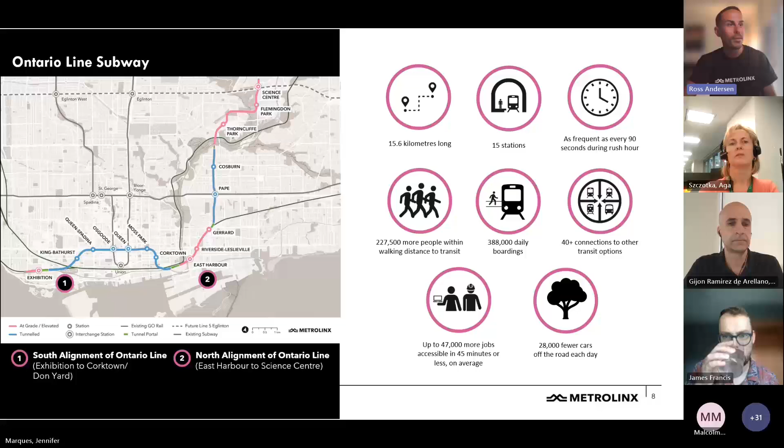So OTG, you'll hear that name a lot this evening, is an acronym for Ontario Transit Group. Ontario Transit Group is a joint venture between a couple of companies, Ferrovial Construction and Vinci Construction, but essentially they're the folks designing and building what we know as the southern portion of the Ontario Line subway, Southern Civil in other words. The southern portion is the highlighted portion you see in this graphic here.

The southern portion will consist of one above-ground station integrated with the GO Transit station. That's the Exhibition station that will be rebuilt, serving as both a GO station and an Ontario Line station. There are the two underground stations I mentioned, where you'll intersect with Osgoode and Queen Subway Station, but there will also be 4 additional stations in the southern alignment at King Bathurst, Moss Park, Corktown, and the station we're discussing tonight, Queen Spadina. Overall, the southern portion tunnel will be 6 kilometers long, with associated tunneling works from Exhibition to the Don Yard portal.

A portal is where the subway is going to enter the earth and exit the earth. Next slide, please.

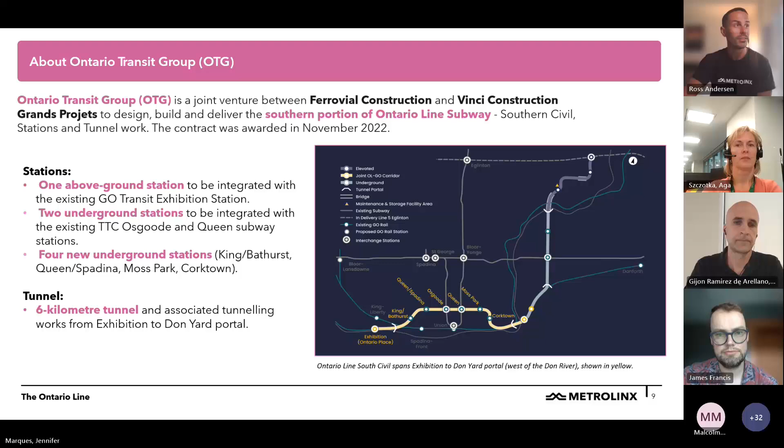Let's talk a little bit about Queen Spadina Station. I'd mentioned earlier there are 2 stations at Queen Spadina. We call them head houses - this is where you enter the station. Essentially, it'll be at the northwest/southwest corner of Queen Spadina, and then there will be one at the northeast corner. The Queen Spadina station is really interesting because the heritage facade is being protected at the northeast corner.

You might have noticed a big freestanding wall where you walk by on the north part of Queen Street. That wall will stay there throughout construction, and the intention is to integrate that wall with the design back into the station. Queen Spadina is not the only area where we're doing this - it's happening as well at Osgoode and at King Station. This is one of the ways the Ontario Line team and Metrolinx team are working to preserve some of that history while integrating it with modern subway technology.

As I'd mentioned, there are 2 new station buildings that will be constructed, and the current plans envision maintaining streetcar services through these areas throughout the duration of the project.

One thing that's really important to note is Metrolinx and the Ontario Line team work very closely with TTC. We are aware that streetcar service sometimes can be disrupted, and we do know the reality of what's happening on Spadina, where there are buses currently serving as streetcars until the end of the year. This isn't going to necessarily affect the project, but these are some of the conversations happening behind the scenes to make sure there is a seamless workflow between so many different projects happening in the city at once, whether it's the TTC transit project, other condos being built, or other parades in the area. Everybody has to work together to some degree to make sure the city can continue to function as a city.

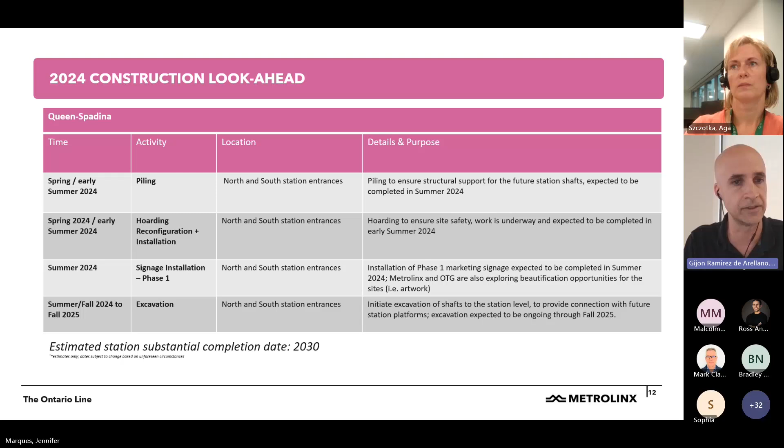During the spring and early summer, we will complete the piling works. Piling works are constructed to provide a safe infrastructure to proceed with the next activity, that is the shaft excavation. We have been doing piling since February, and we are expecting to have this activity completed on the southwest corner in July.

2024. Right after the piling works, we will complete the installation of the hoarding in both entrances, and then we will proceed with installation of the signage. Those signs in phase one will be related to marketing regarding Metrolinx and the Ontario Line project. And we are also exploring beautification opportunities for the sites with some artworks and future renderings about the project.

Starting in July, few days from now, we will start the excavation of the northeast corner, northeast station. This activity will start in July and will continue up to the fall of 2025. This activity for excavation will include not only the excavation of the shaft, but also the excavation of the station below Queen Street.

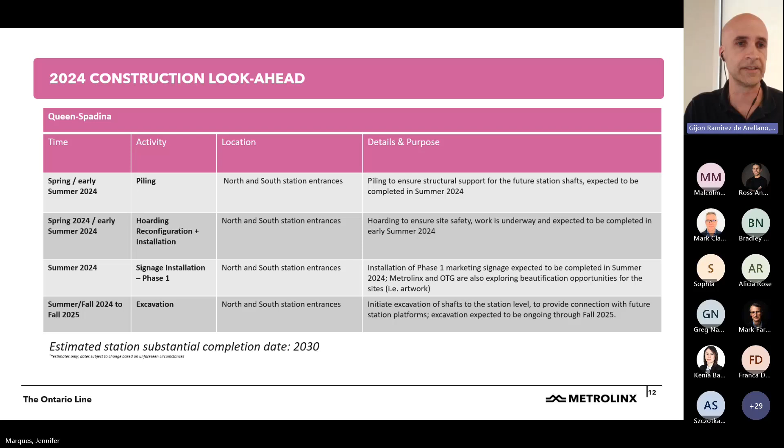So we maintain the estimated station substantial completion date for this project in 2030. This includes not only Queen Spadina Station, but also the 7 stations that are in Ontario Line South and the tunnel. We can go to the next slide, please.

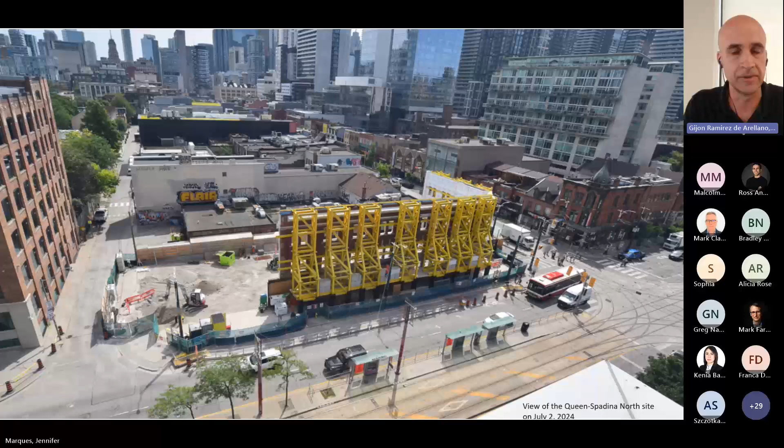So this picture that you can see in the presentation was taken a couple of days ago, this week, July 2nd. On this view, you are able to see the facade that has been retained in place. This facade will be integrated into the future station building.

And on this picture, we can see that all the piles have been completed inside of the station footprint. And we are working right now on temporary works to start the next activity, the excavation of the shaft. We can go to the next slide, please.

Okay, next slide. I will speak now about the excavation. As Ross has explained before, this station has 2 main entrances. They are 2 what we call shaft entrances. Those shafts go from the street level and 40 meters down in order to connect the station with the tunnel. The tunnel goes from the Exhibition portal to Corktown, 40 meters below the street level.

So right now we have completed the support of excavation, and we will mobilize all of our equipment to start the excavation. The first 18 meters, we will see clays and sand, so soft materials. Below 18 meters, we will find the rock that is part of the bedrock for this area.

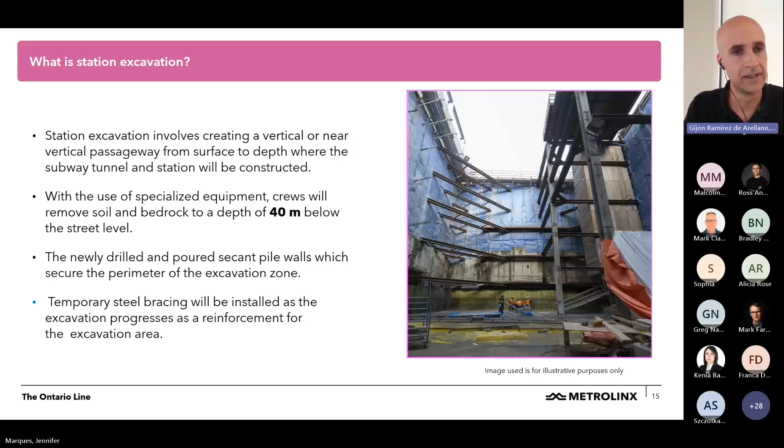So the excavation schedule for Queen Spadina, as I mentioned before, we are planning to start in the northeast corner in July 2024. We'll arrive to the level of the cavern by the end of the year, and then we will start the excavation of the cavern in early 2025 up to the end of 2025, late fall 2025.

The expected hours of work for these sites are 7 a.m. to 11 p.m. working in two shifts. We will have some occasional overnight work and Saturday shift during the day. This will happen in both entrances, north and south.

We are anticipating to start excavation on the south by late August, and from this side, from the south, we will only excavate the shaft. We will not do any excavation of the station from that point.

Okay, we can go to the next slide.

What you will see around the construction site during these activities, or in the coming weeks, is that all the drilling machines that we had on site will be demobilized as we complete the piling works. And we will deliver some excavation equipment.

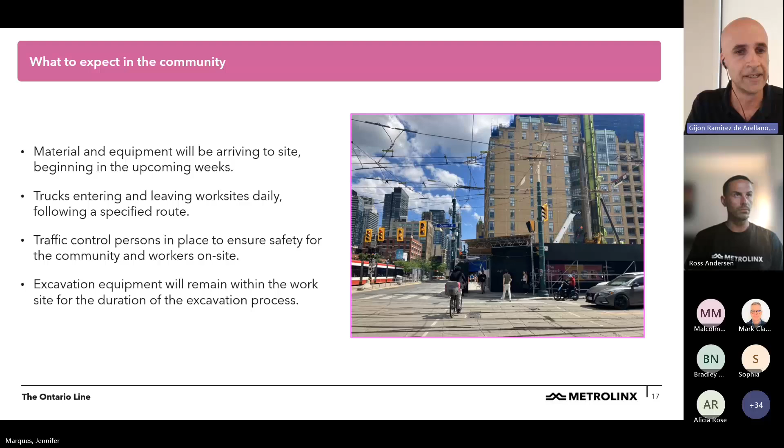Okay, we can go to the next slide.

Okay, we can go to the next slide.

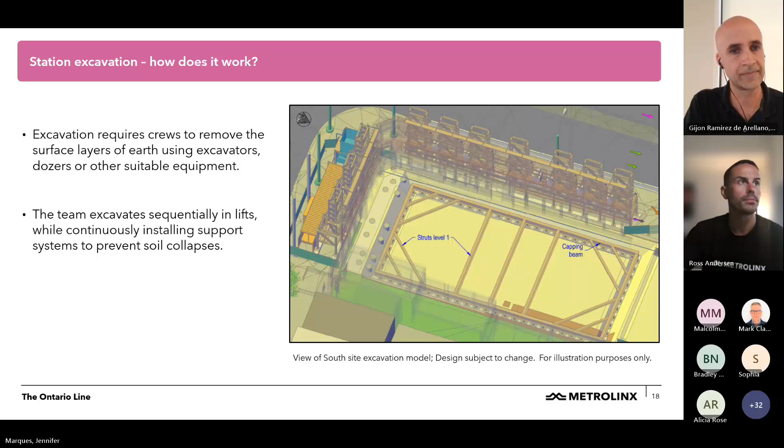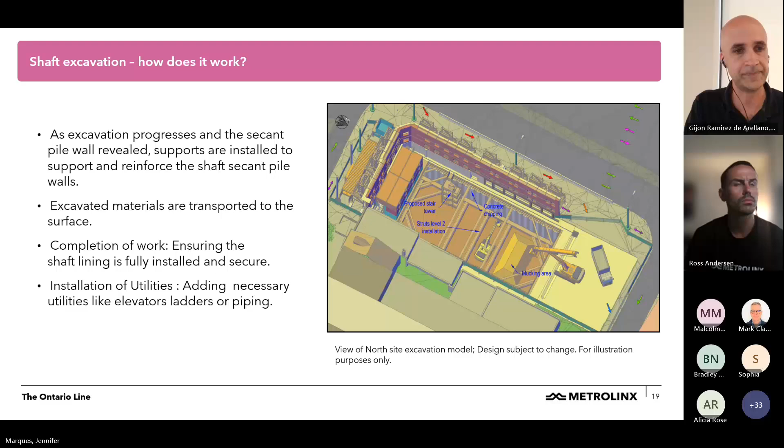This full system will prevent any damage to the adjacent structures or any settlement on the road or a streetcar or buildings. We can go to the next slide.

So this is a list of materials that you will see on the project in the coming weeks. So we will have multiple excavators. The plan is to have 2-3 excavators on the subsurface. There will be one on the surface.

We will see dump trucks entering and exiting the site. Those trucks will be loaded by excavators, and they are hauling this material off the site to the approved dump site facilities. Loaders are used also to load trucks, and from time to time we will see cranes to be able to put the equipment inside of the shaft.

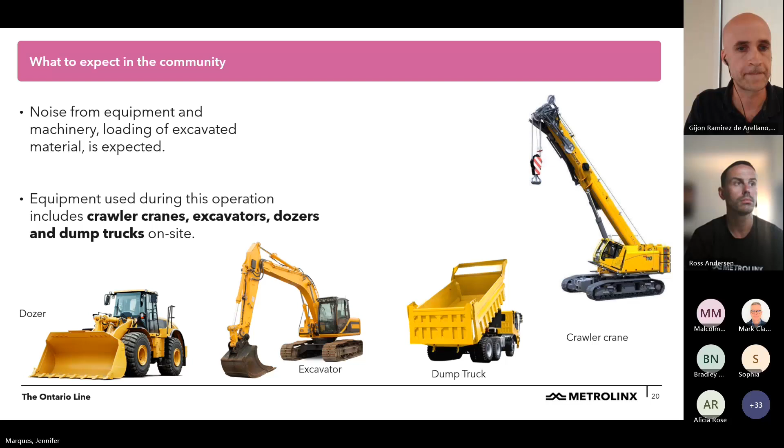We can go to the next slide. Okay, we can talk now about how we are planning to reduce impacts to the community. We can go to the next slide. So talking about the access points and lane affections that we are going to have here.

So about the northeast corner of Queen and Spadina, our plan is to have the trucks entering from Spadina southbound. They will access the site and they will exit through Bulwer Street. Okay, and then from there they will be directed to the main roads in order to haul off all this material from the site.

On the southwest corner, the trucks will enter from Queen Street. They will be loaded on the site and they will exit onto Spadina Avenue going south. We will maintain all the sidewalks open and accessible. We will have a parking lane closure on the northeast corner. This parking lane closure is currently closed.

I think we are going to talk about the lane closures in the next slide. I think, yeah, I have mentioned all the traffic routes. We can go to the next slide.

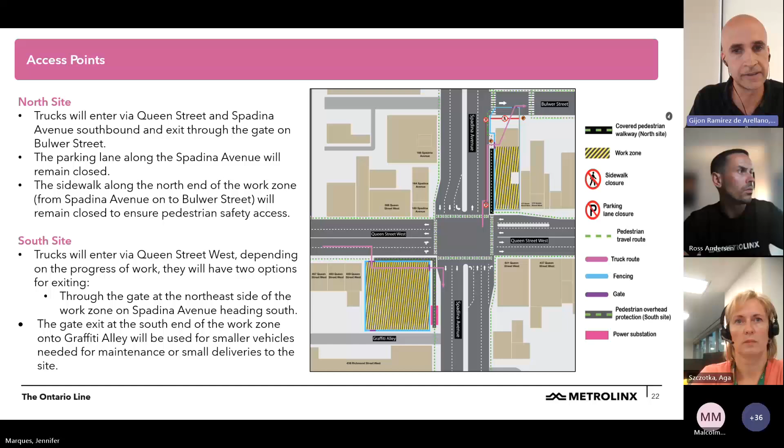All the sidewalks and bike lanes will remain open, so pedestrians will continue to use sidewalks along the work zone. For any particular activity that may require a temporary closure of the sidewalk, we will facilitate pedestrian access at all times using flaggers and alternative pedestrian routes.

The parking lane on Spadina Avenue will be closed. It's currently closed since we started the project, and we will maintain it closed to facilitate access of the trucks and also to avoid any damage to vehicles that could park in that area. The curb lane on Queen Street West eastbound will be closed daily to facilitate truck access to the southwest entrance.

We will maintain all the lanes open with the exception mentioned before. Queen Street westbound will maintain the two lanes currently in place. Spadina Avenue has no traffic restrictions. Graffiti Alley will remain open, and Bulwer Street will be accessible. We don't expect any impacts to traffic or public transit.

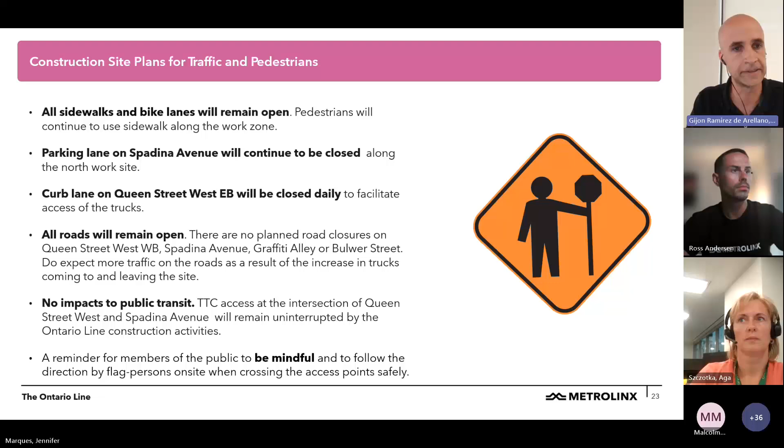I'll pass this to Aga, our environmental manager. She will speak about the measures we have in place to minimize noise and air quality disruptions. Thank you, Sergio. I'm going to discuss the impacts we are expecting during our excavation works.

Let's start with air quality. We may expect some dust coming from excavations, and we have mitigation in place to keep dust to a minimum, such as dust suppression, most commonly. For minimizing noise, we have site hoarding installed.

We also have a one-way truck system to avoid backing alarms. For any possible mud tracking from the site, we will use street sweepers on a regular basis. We've also already installed mud mats at both sites. You can see one of our mud mats here. They are really good at getting most of the mud off truck wheels and provide additional mitigation alongside the street sweepers. We also propose a drainage system to ensure site water is gathered and runoff is minimized.

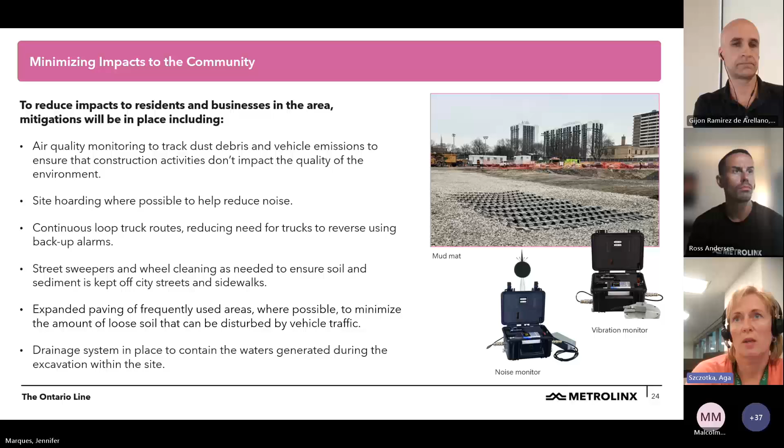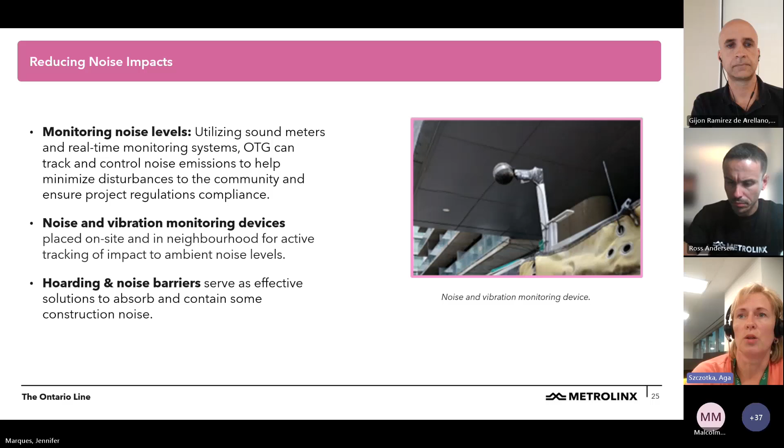In terms of noise from the excavations, we are monitoring our noise levels live. Readings come to our environmental team, and we are able to read them and discuss them with our site teams. Same for vibration monitoring. As mentioned before, the hoarding provides quite effective mitigation for reducing noise.

Next slide, please. All right, I think that's it. Thank you so much, Aga, and thank you so much, Sergio, and thank you everyone for listening.

There's a lot of information that was just covered. To briefly recap, we discussed three major points: the next phase of construction, excavation, which will be happening later this summer and continuing into fall 2025 at both sites; maintaining traffic flow with a one-way in, one-way out system for trucks integrated with the current traffic flow at Queen Street and Spadina Avenue; and reducing dust and other impacts like noise.

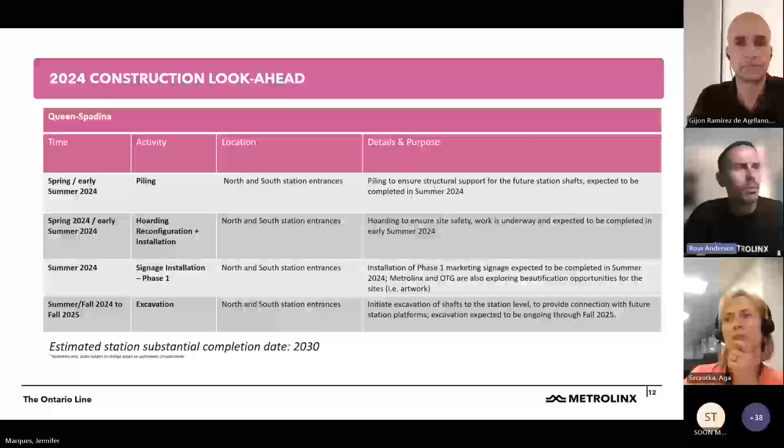Okay, thank you for your question. We appreciate that. Could whoever's sharing the screen please go to slide 10? In the meantime, I'll reiterate the question. There's threefold to this. First, will the subway tunneling happen underneath 438 Richmond? We see Richmond Street on the map, and 438 Richmond, according to this map if it's to scale, is not in the path of the tunneling.

The question also was about utilities. James, perhaps you might have some information.

Thanks, Ross. Just to add to that, the Ontario Line is quite deep at this location. We have a line that's kind of at the surface at Exhibition Station, and then we go underground through this part of downtown, and we're quite deep, well below street level. That's to get to the right depth to avoid utilities, and also to get us under the next station east of here at University, so we're below the existing Line 1 TTC station. The line will be constructed, tunneled, and operated surrounded by rock, so we don't anticipate any perceptibility of the subway operating at nearby buildings in future. We're very pleased to be bringing subway service to this community, with entrances on the northeast and southwest corners of the intersection, but without impacting folks in those buildings. So this will be very deep and not really perceptible to folks in the neighborhood once we're into operations.

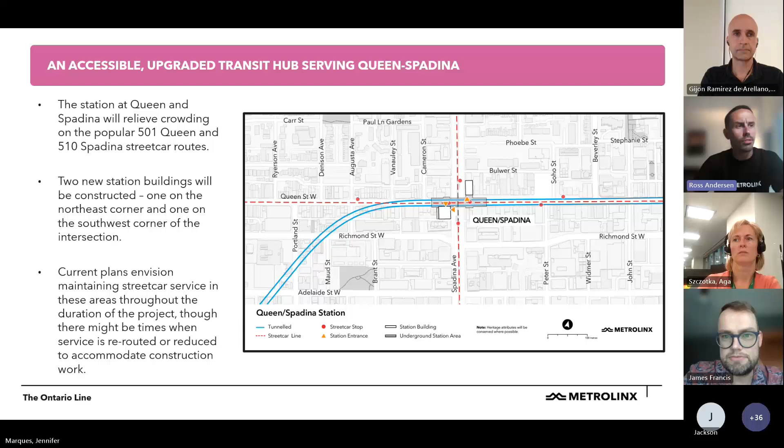Jackson, you'd asked about the hours for excavation. On the south site, excavation is going to begin roughly in August. Working hours will be weekdays from 7 a.m. to 11 p.m., occasionally overnight and Saturday shifts, but we try to avoid those because we don't want to work on weekends, and we want to respect the tenants who live in the area, because people don't want to be woken up from construction.

On the north side as well, it's 7 a.m. to 11 p.m., occasionally overnight and Saturday shifts. A lot of the times the work hours are subject to change, they're weather dependent. Sometimes schedules change, but we'll be sure to communicate that with 2 weeks notice or more if we're able to, so residents are able to make adequate plans ahead of time should there be weekend work.

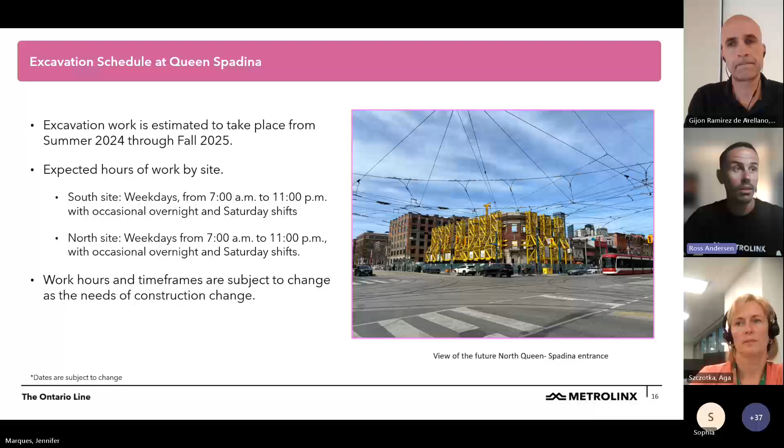Thank you so much for your question, Sophia, it's certainly an important one. I'm going to ask my colleague behind the screen—Jennifer, can you go to slide 26 for us please? There's a lot of good information here about dust. Aga, can we talk a little about the difference between the dust caused by piling versus some of the dust folks might see from excavation, and how effective some of these techniques are in suppressing the dust?

The residents I spoke to at the Morgan at 438 Richmond last week still experience a lot of dust coming into their windows. I know a lot of these residents face the construction site, and we do have a lot of these techniques in place, but is there anything more that can be done than what is currently being done?

Absolutely, Ross. So the difference is with piling works, we started piling in the top level of soils, and there's a lot of loose, thin soil that's very easily disturbed, and that's where the dust is coming from. We started applying different techniques, different mitigations, so by now we know what works better and what really didn't work. We had our lessons learned.

Going into excavation is a bit different scenario. You've got again a first layer of some loose soil, so we're going to mitigate that much stronger with more water suppression. Then going deeper, that ground is more saturated, isn't so dusty, so we expect much less dust coming. At the same time, we as the OTG environmental team are working on a new strategy for the entire project—as I said, we had our lessons learned, we know what works and what isn't working so well.

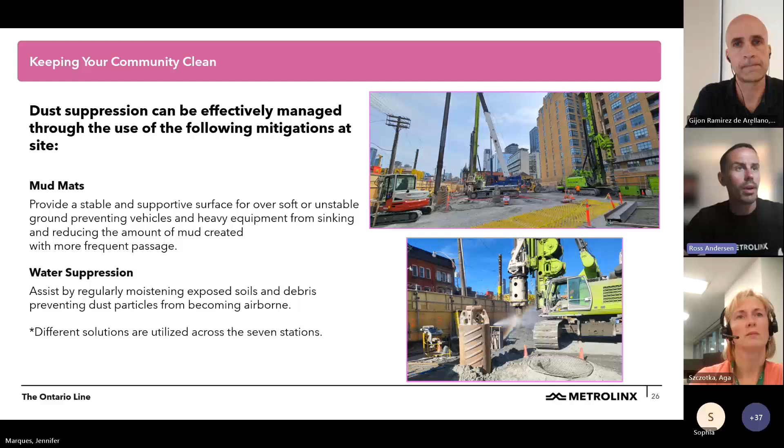Hi there, I'm the general manager of the Horseshoe Tavern, and obviously I'm right on top of the northeast corner. My biggest concern right now, and I've already felt it, is the vibration from the drilling of the piles. At times of the day or night when we're trying to do our normal business of live music, it becomes very disturbing to have the whole building shake like a leaf. I assume that's only going to get worse when they start digging downward, 40 meters. Is that the case, or is there anybody watching how much movement this whole thing's going to be causing?

That's a great question, Bruce. I'm going to go to Gijon. This is a music venue very close to the northeast site, Queen-Spadina. Bruce is asking whether it's going to be the same disruption, the vibrations, as there currently was during piling. Once piling is done, is it still going to be shaking the nearby businesses, and will it get any better? The more excavation is done as it goes deeper underground, will it still be shaking the earth?

As I explained before during the presentation, the first 8 meters of material that is excavated is very soft material, clays and sand. This is very easily excavated, and we don't need hammers or heavy equipment, so this activity is not creating a lot of vibration. We don't expect to exceed the limits of vibration that are normal for regular activities. As we go down below 8 meters, we are far from the surface, so we don't expect that the vibration created when we excavate the rock affects the buildings at the surface. Those shafts go up to 40 meters from street level, and as we go down, the feeling of vibration from this activity is less and less. For the excavation of the tunnel, it's going to be done with TBMs, tunnel boring machines, and those machines will not be creating vibration on the surface.